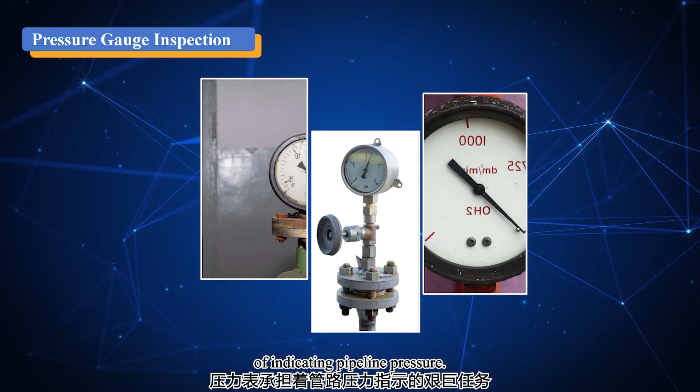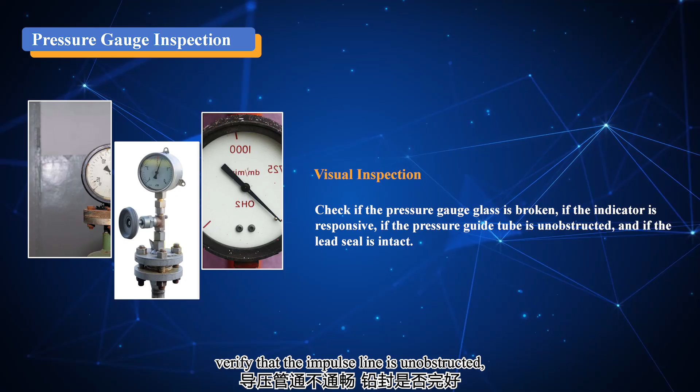Pressure gauges bear the critical task of indicating pipeline pressure. We primarily rely on functional verification through visual examination. Check for any cracks, ensure the pointer is responsive. Verify that the impulse line is unobstructed and confirm that the lead seal is intact. Pressure gauges must be regularly calibrated to ensure accurate readings.

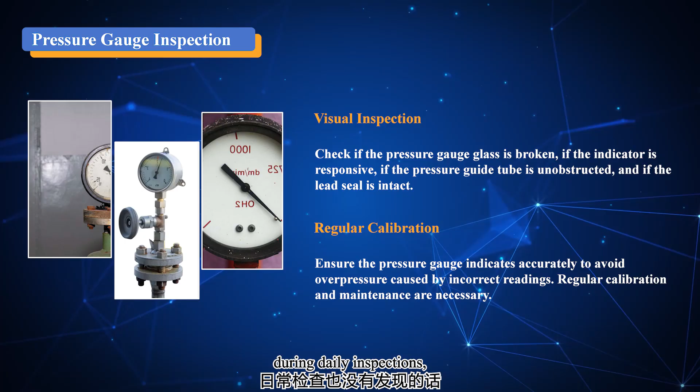If a pressure gauge is damaged and not repaired in time, and if the damage is not detected during daily inspections, misjudgment of pressure could lead to overpressure in the pipeline, potentially causing safety accidents.

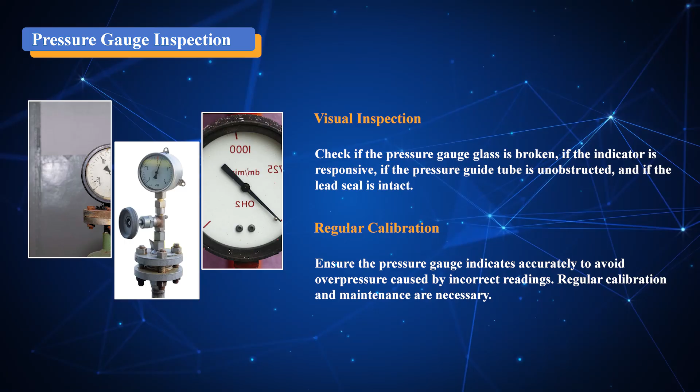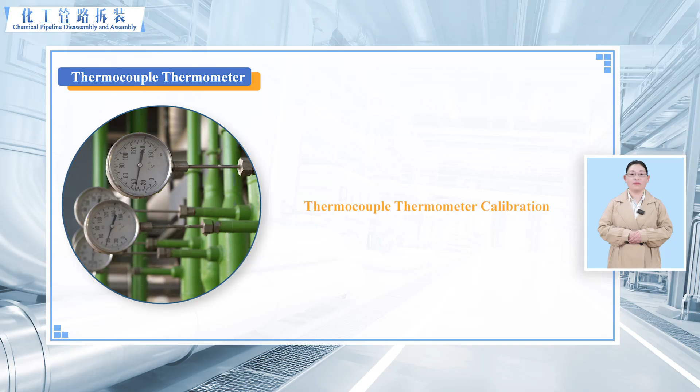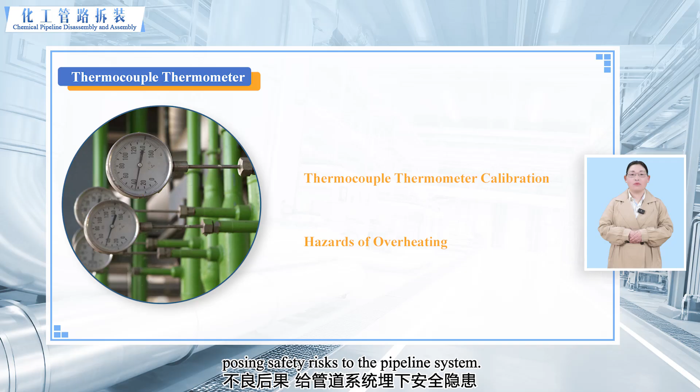The inspection method for thermocouple thermometers also relies on visual examination. The main focus is to ensure that the indicated temperature is accurate. If a thermocouple thermometer fails and does not display excessive temperatures, it may lead to stress, corrosion, creep, and other adverse effects on the pipeline material, posing safety risks to the pipeline system. Therefore, regular calibration and maintenance are essential. Issues should be identified and resolved promptly.

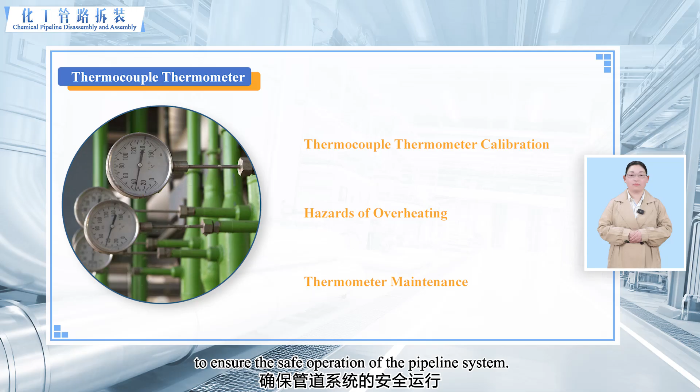To ensure the safe operation of the pipeline system, for pipelines that are prone to overheating or operate at high reaction temperatures, safety valves are typically installed. Safety valves act like fuses in our homes.

During inspections, the main focus is on whether there are any foreign objects stuck between the valve core and spring, whether the adjustment screws are loose, whether the spring and other components are damaged, whether there is any gas leakage, and whether the lead seal is intact. If a safety valve fails to open during overpressure conditions, it can easily lead to explosion accidents. Regular inspection and maintenance as well as calibration during shutdowns or pressure relief ensure that the safety valve is always in optimal condition.

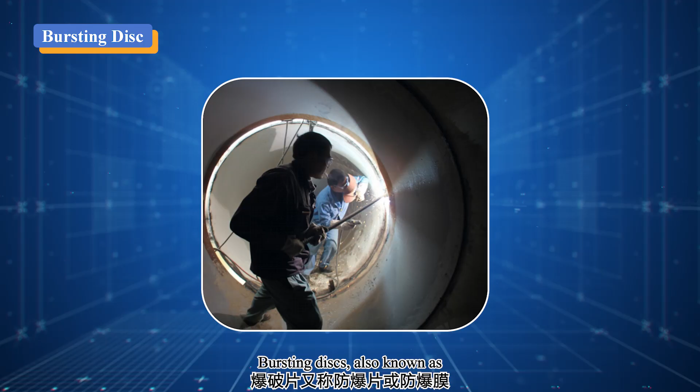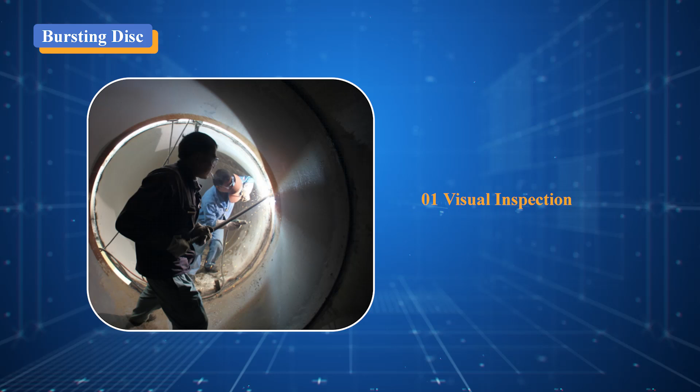Bursting discs, also known as rupture discs or explosion-proof membranes, rely on the rupture of the membrane to release pressure, forcing the container to stop operating after pressure relief. They are one-time pressure relief devices. When the pressure difference across the disc reaches a predetermined value at the set bursting temperature, the disc will activate, rupture, or fall off, and release the fluid.

Before installation, carefully inspect for any cracks or damage, and ensure the specifications and models match. During daily inspections, observe whether the membrane has any defects, and replace the bursting disc regularly to prevent aging or damage.

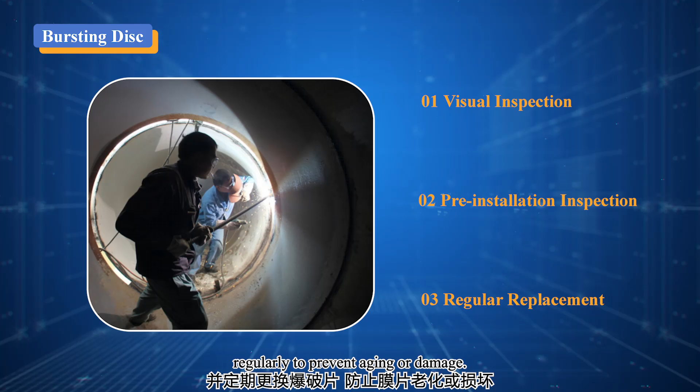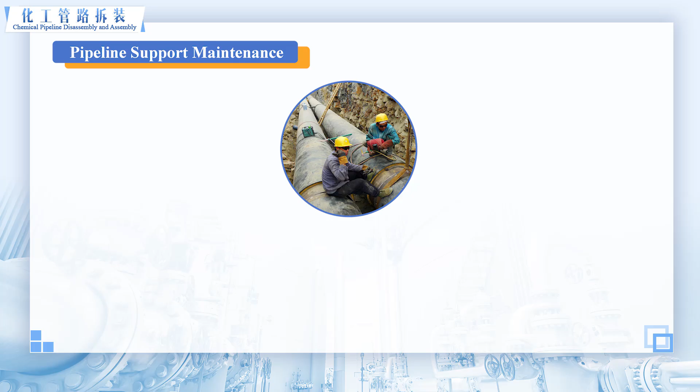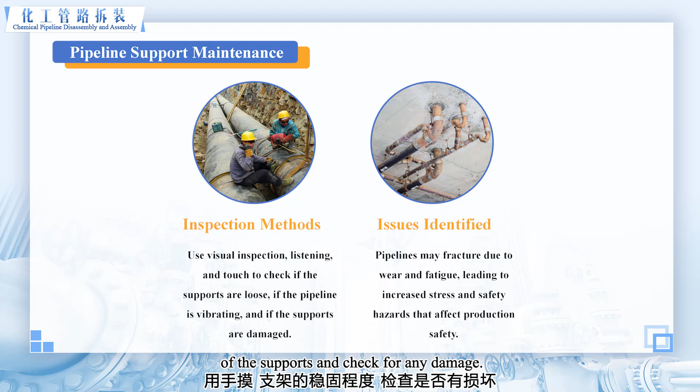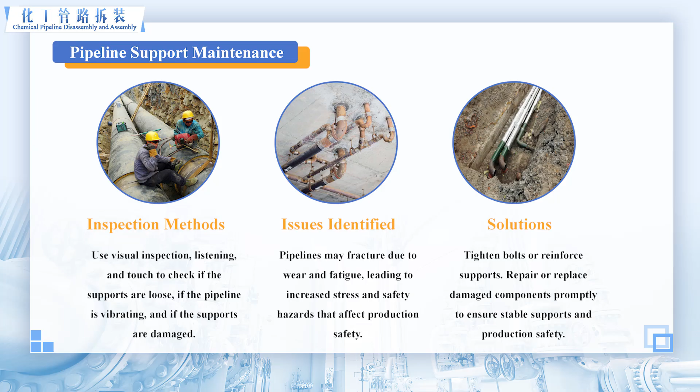Pipelines are like the blood vessels of our city, and supports are the skeleton that holds these vessels in place. So, how do we check if these supports are healthy? It's simple. Look, listen, and feel. Use your eyes to see if the supports are loose. Use your ears to listen for any abnormal vibrations in the pipeline, and use your hands to feel the stability of the supports and check for any damage. For loose supports, tighten the bolts promptly to reinforce them. For damaged components, repair or replace them as soon as possible.

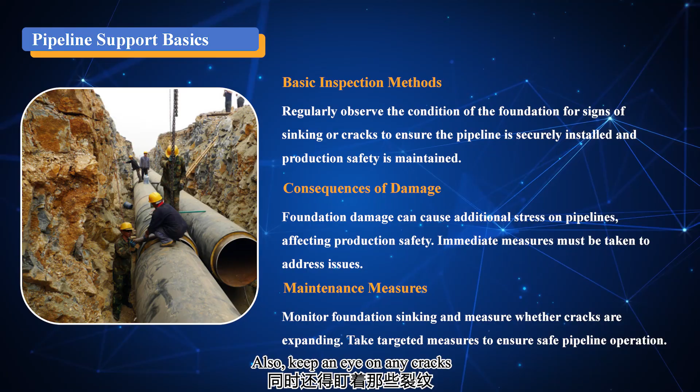Earlier, we discussed pipeline supports. The foundations of these supports are similar in function. Regularly observe the foundation for any sinking, and address it immediately if detected. Also, keep an eye on any cracks to see if they are expanding.

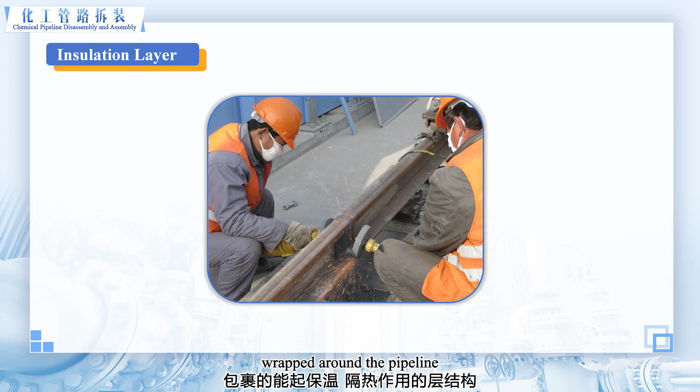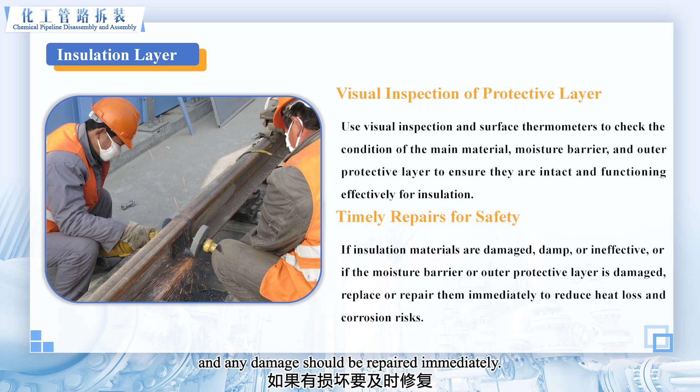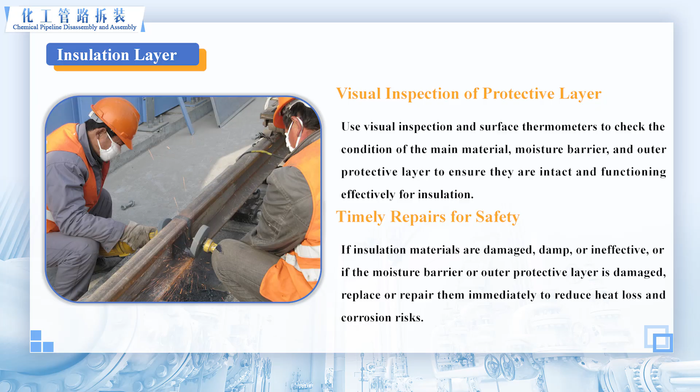The insulation layer refers to the structure wrapped around the pipeline that provides thermal insulation. When inspecting the insulation layer, we mainly focus on whether the primary material is damaged, detached, damp, or ineffective, whether the moisture barrier is damaged or ineffective, and whether the outer protective layer is damaged or detached. If any of these issues are found, the insulation material should be replaced promptly, and any damage should be repaired immediately. If problems are not identified and addressed in time, it could lead to heat loss and corrosion of the pipeline, or even premature failure of the insulation structure.

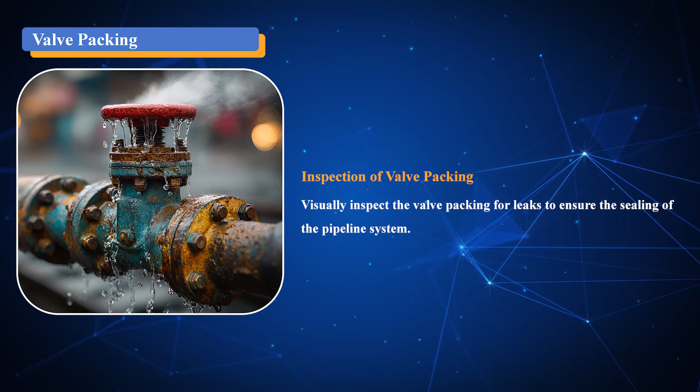Valves are ubiquitous in pipelines. Their sealing primarily relies on packing. During daily inspections, pay attention to whether there is any leakage in the valves. If there is any dripping or leakage, replace the valve packing promptly, to prevent chemical materials from leaking into the environment, which could cause injuries or even fire and explosion accidents.

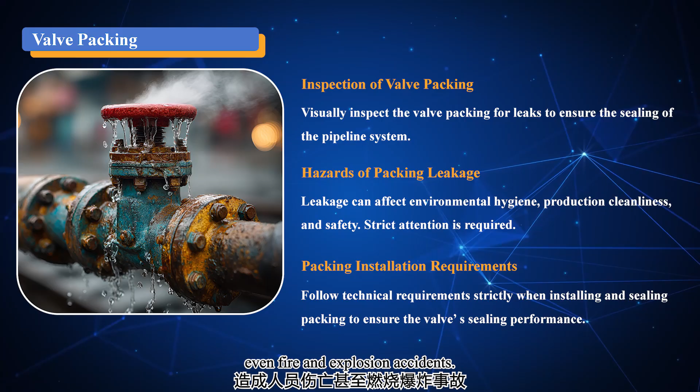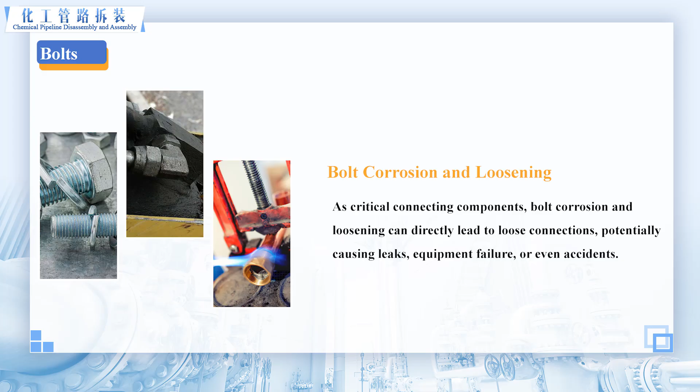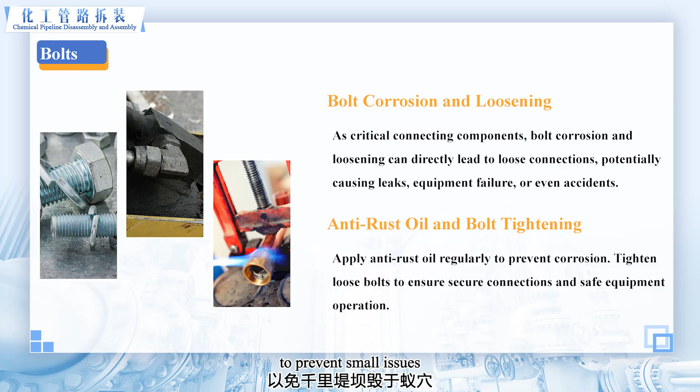Finally, let's look at bolts, which are found in every corner of the pipeline and are responsible for the stable operation of the entire system. During daily inspections, check whether the bolts are loose or corroded, and tighten them or apply anti-rust oil as needed to prevent small issues from leading to major failures.

Through this lesson, we have learned about some of the key aspects of daily pipeline inspections. By identifying and addressing potential safety hazards during inspections, and by reporting and repairing issues promptly, we can prevent many accidents from occurring. Safety in production is everyone's responsibility.